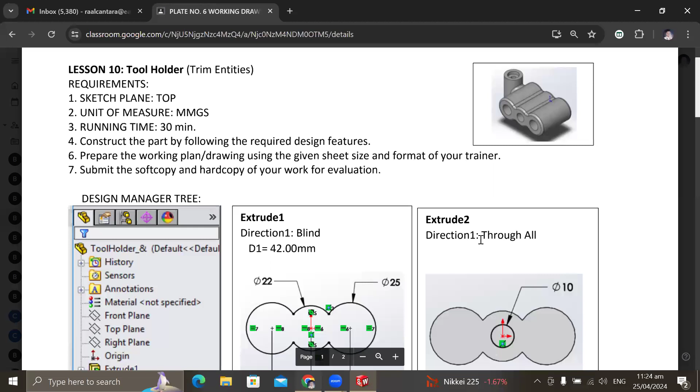Okay, so let's now follow this area. As you can see, we made an extruded boss base using the given drawing description.

Let's now start by making several types of circles within the prescribed sizes. We have 22 in diameter and also 25 in diameter. Let's just set that first before we indicate the distances in between.

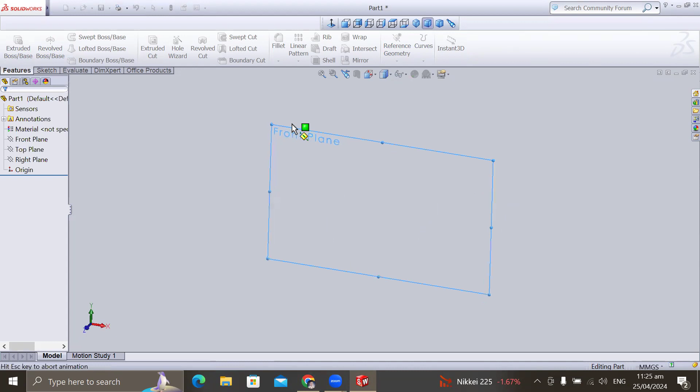Click the SolidWorks application, then select the extruded boss base features, then set on the front plane. From the point of origin, let's make a circle from this position. Then, before making the next set of circles, it needs to be aligned with the circle we made earlier. So click here, then make a circle.

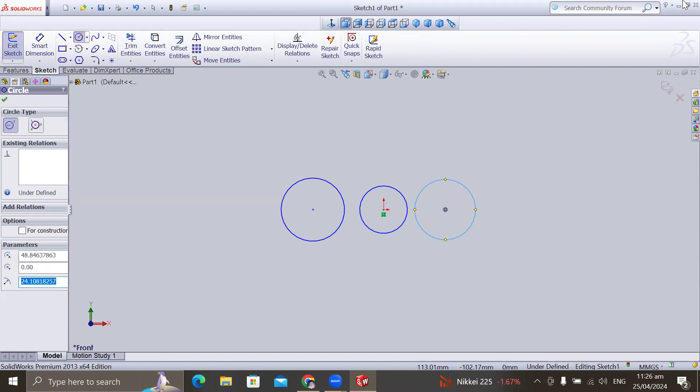Using the smart dimension, let's set the proper size for the circle. The instruction indicates it should be 22, right here in the very center. This is our center circle.

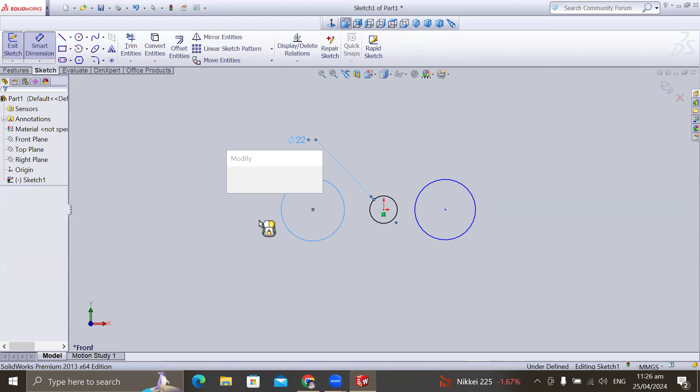And on both sides, we have two circles which have a diameter of 25. Just follow that size description so we can follow the set of activities here. So 25 again on this area. Confirm, or enter. Let's just wait since our PC is lagging a bit.

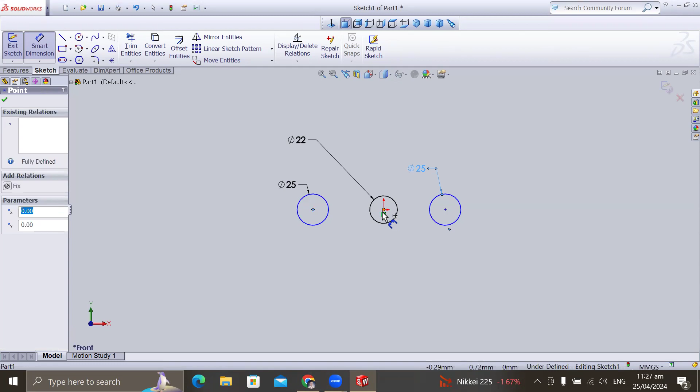Next, let's see the distance in between. From the first center of our circle going to the origin, we should have at least 19 as the measurement. Same goes for the other side, because if we double this distance, 19 plus 19, our major dimension becomes 38. So to continue, let's have the dimension from this point going to the origin. It should be 19. Enter.

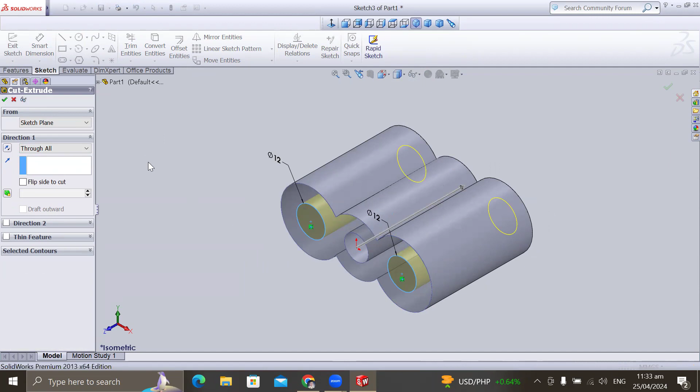So confirm, and with that we made this lateral area for our next spaces. I think we're almost done, so we should just follow the real features from these spaces.

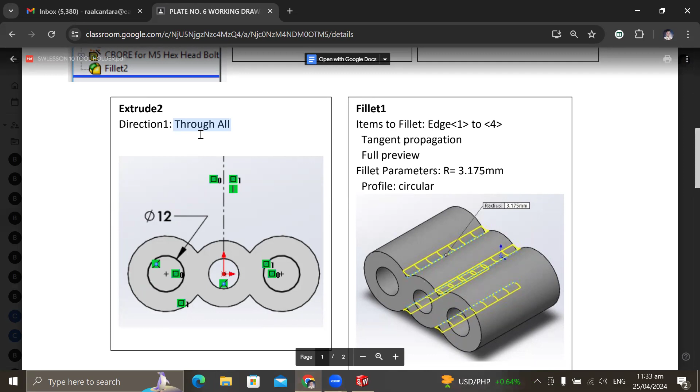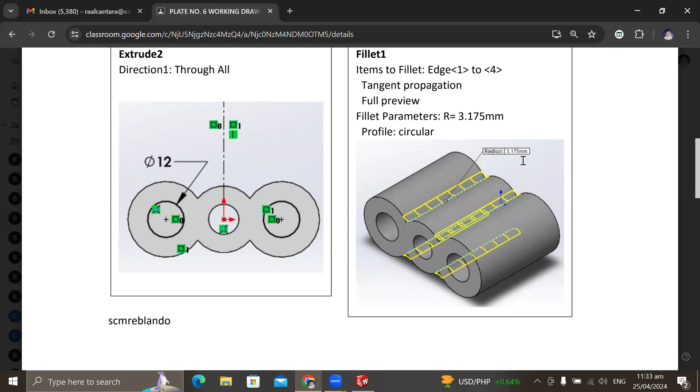On the next part of the transition, let's use the fillet command. From this area, we should adjust the fillet parameters given the selections at these points. The radius should be 3.175 mm. So let's go back to SolidWorks using the fillet command.

Click fillet. To make the selection easier, we can rotate the view by clicking and dragging or using the scroll on the mouse. Select the lines to fillet. This face should turn blue together with this area.

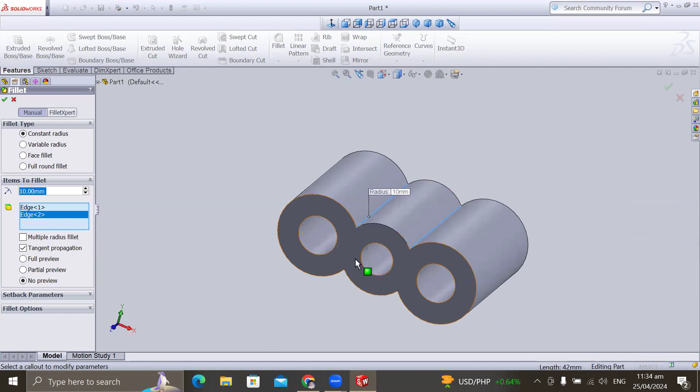It's a bit hard to click based on the given instruction or structure since our drawing is somewhat grayscale. If we adjust that based on the required features, for example making hidden lines visible, it becomes easier. But let's just try to make this based on the description in our drawing.

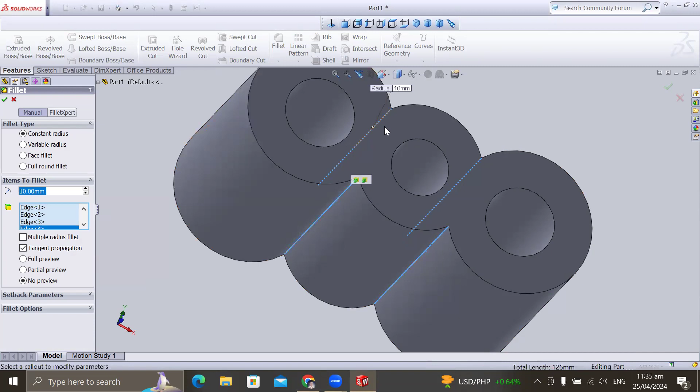So this part, and this one - let's rotate it to the very bottom so we can get all four. Once we've selected the 4 edges, we should adjust the fillet parameters to 3.175, based on the drawing features or instructions from the PDF.

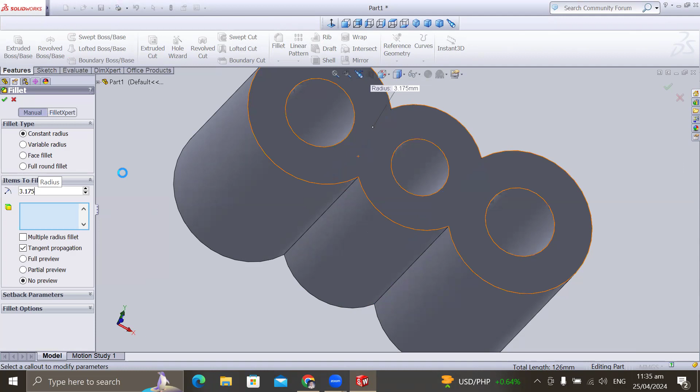So confirm, or double enter. Let's just wait for it to load so the selected edges change. And with that, we have achieved this type of faces.

If you can see, the shape of our drawing is now very symmetrical. Let's go back to the pictorial view so we can continue to the next phase. Okay, let's go back to this area. Here, we are now making a midplane.

I mean, the cylinder from this area with the required face features of extrude 4 - I think we should still use the extruded boss base feature from this area since we're making something like this. And we should follow the spaces indicated in the size description.

Let's now go back to SolidWorks. From SolidWorks, let's click on the extruded boss base feature. But for the selection, so we don't have a hard time, let's bring out the FeatureManager Design Tree.

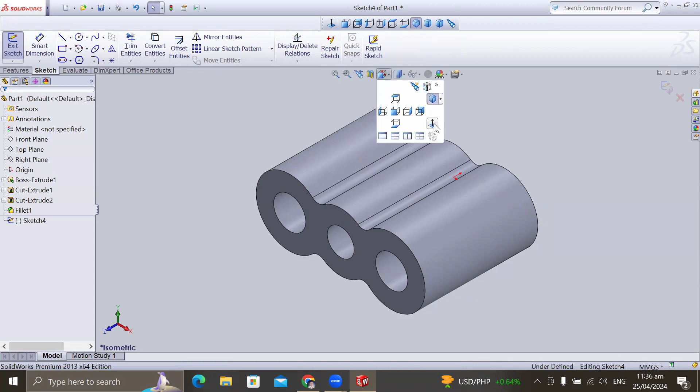Let's click on the top plane from this area, since we're making the drawing on the top plane. Then we should select the normal view position so we can go to the very top of our drawing. From there, let's now set the size description for the sketch we'll make, which is still a circle.

From the circle, we should have a size of 14 as the distance from the edge of the drawing - I mean from the very end of our drawing's spaces going to the adjustment features, this should be 14. Then from the origin going to this area, before we set the distance or gap from this point, we have a measurement of 38.

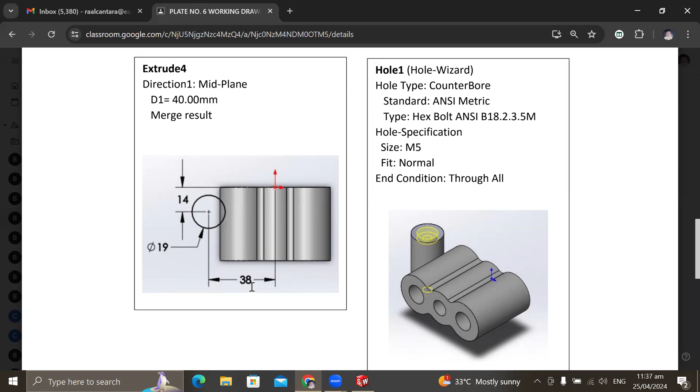Let's now try to access all the necessary information needed to identify from this step. Let's now have this circle space. Click here, then click sketch, then find the circle.

Just make a circle in this area, any size for now since we'll set the measurement after. Use smart dimension going to this area - click anywhere there, from our base point going to the origin. From the point of the origin, then from the center of the circle, the distance should be 38. So 38, enter.

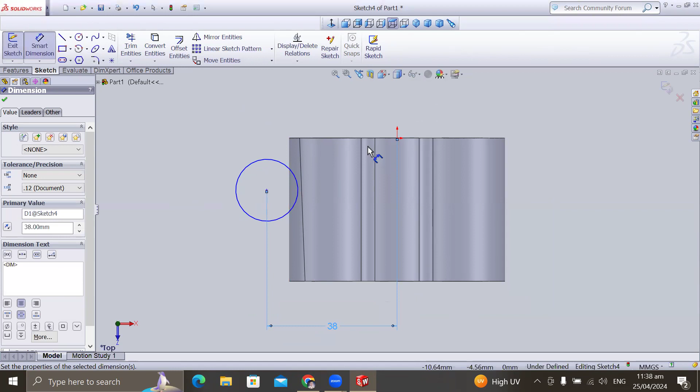And then from this endpoint, going to the center of the circle, the distance should be 14. So 14, enter. Then we should identify what the measurement of our circle will be. So back to this - the diameter will be 19.

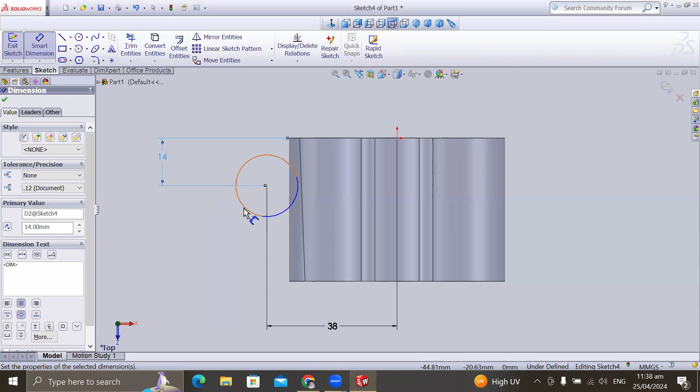Let's now create this by clicking the circle, then modify with smart dimension, and change it to 19 in diameter. So 19, enter. And with that, we already have these spaces.

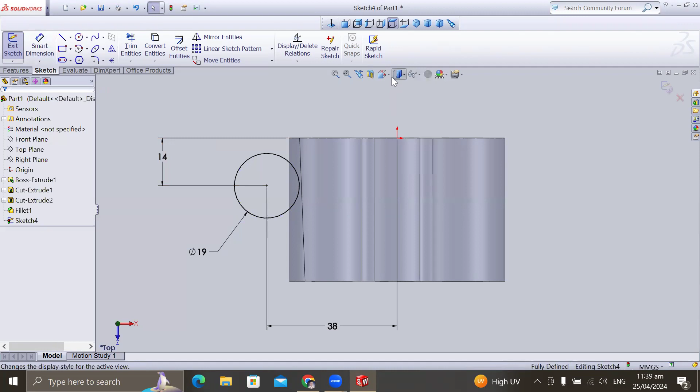Before we exit the sketch, let's confirm the dimension. I'll show you in an isometric or pictorial view what it will look like based on the adjustment of parameters. Let's go back here - as indicated in the parameters, for the direction we should select the midplane, and the depth of the object should be 40 mm.

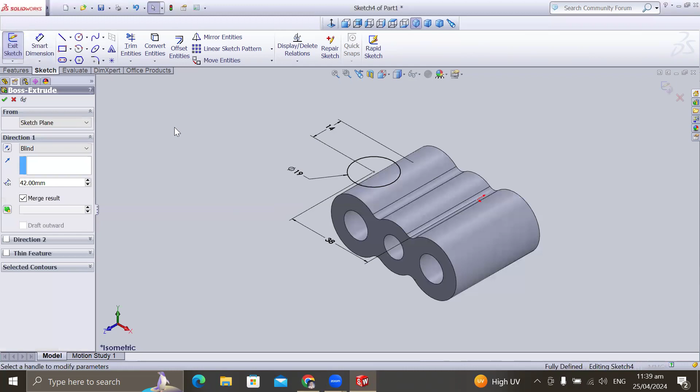Okay, so let's now go back to SolidWorks, exit sketch. After exiting sketch, let's wait for the parameters to appear. So from the blind option, let's look for midplane.

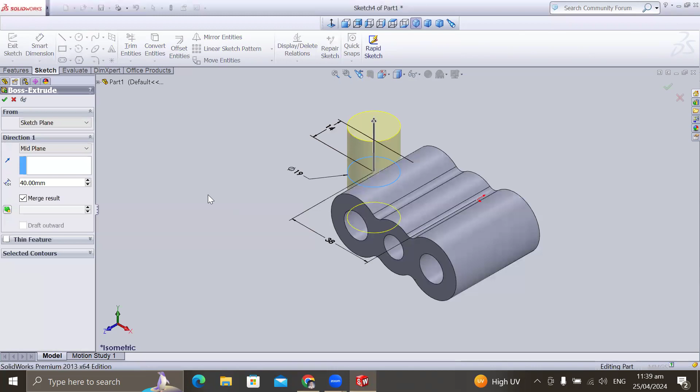And with that, we already have the space for this particular area. So we're almost done, given the last two steps of this activity. Let's now go back to the PDF copy and look at the next step for preparation.

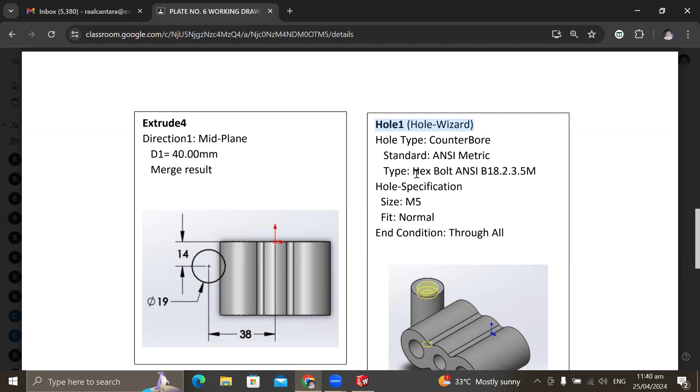So here, we'll use another command-based feature called the hole wizard. From this area, we have hole types, standard sizes, the type of bolts to use to match these sizes, and the hole specifications. All of this will follow the description provided.

So let's go back to SolidWorks. Look for the hole wizard, here it is, click from here. After clicking the hole wizard, let's wait for the parameters to appear so we can set up the configuration needed from the hole specification.

So what are the indicated specifications again? Hole type would be counter bore with the standard size of ANSI metric. So counter bore, click on this part, and then the standard will be ANSI metric. And then the hexagonal bolt would be ANSI B18.

Let's check if it's set to B18. There it is, okay. The size description for the hole specification is M5, already set here. It should be M5. Then the fit would be normal and end condition would be through all. From normal here, that's okay, nothing to change. And through all is already set too.

So how do we position it on the area of our drawing? Just look for position from this point, then click the 3D sketch. After clicking 3D sketch, move your mouse and drag it across our cylinder. When the center point or center line appears, click that center line.

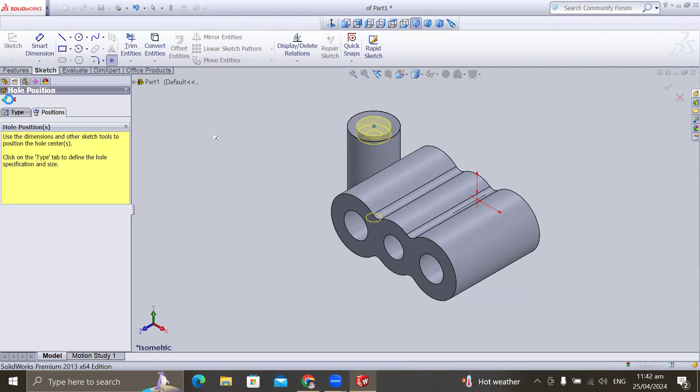As you can see, we've already set that based on the configuration from the instructions we're following. I hope you follow the procedure. So let's now move forward to the last part for this.

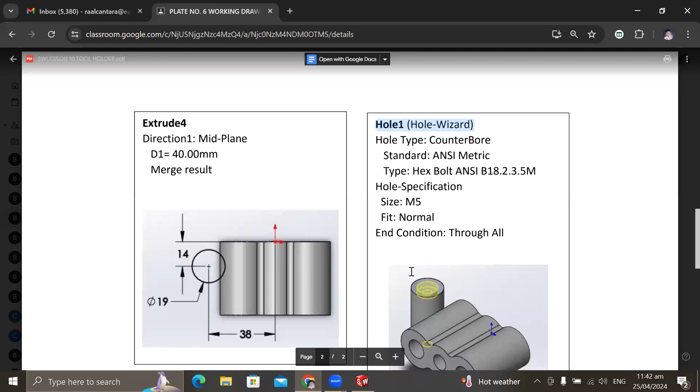Here, we'll just set up the fillet parameters and configuration with 2 mm in size. This will be the last part partition for this, to complete the whole figure. So let's go back to SolidWorks and click on the fillet command.

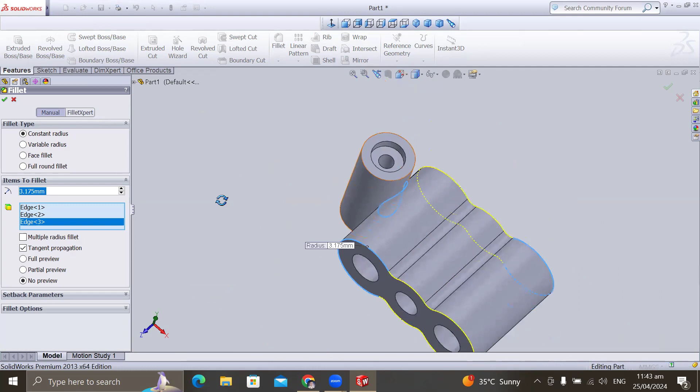It also has its own setup configuration. So let's click here and be careful when selecting points so we can properly identify the fillet parameters that need sizing. From the 3.175 earlier, just change it to 2, then double enter.